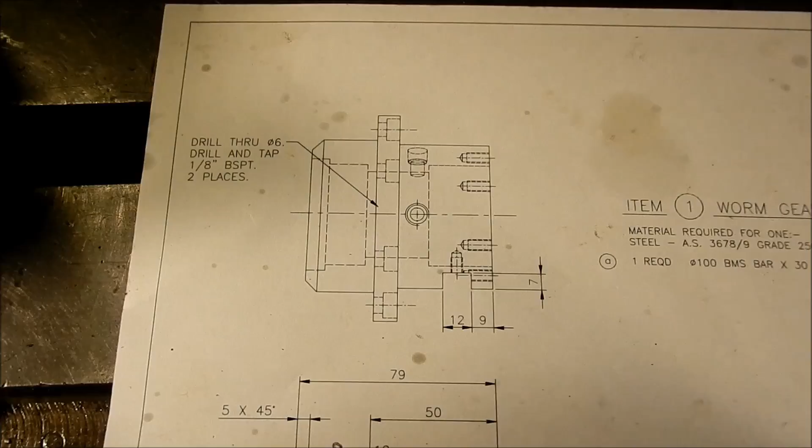We're going to set up on this housing to cut in this little slot for the motor anchor point. We're also going to do the drilling and tapping for the oil filler. We're also going to be drilling and tapping a couple of M5s in here for that motor anchor to bolt off.

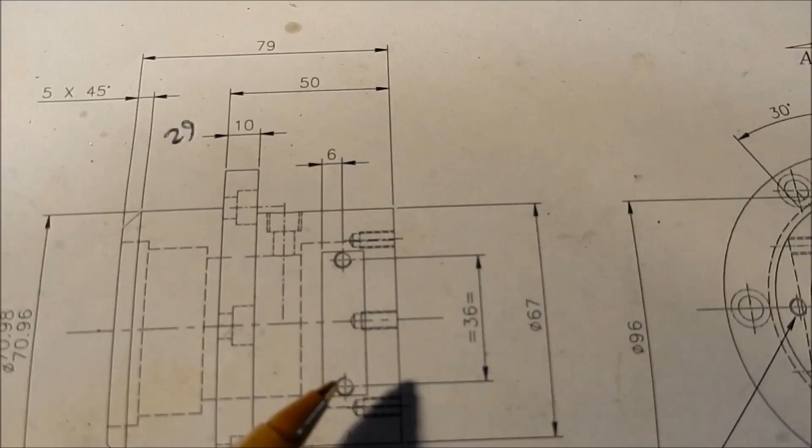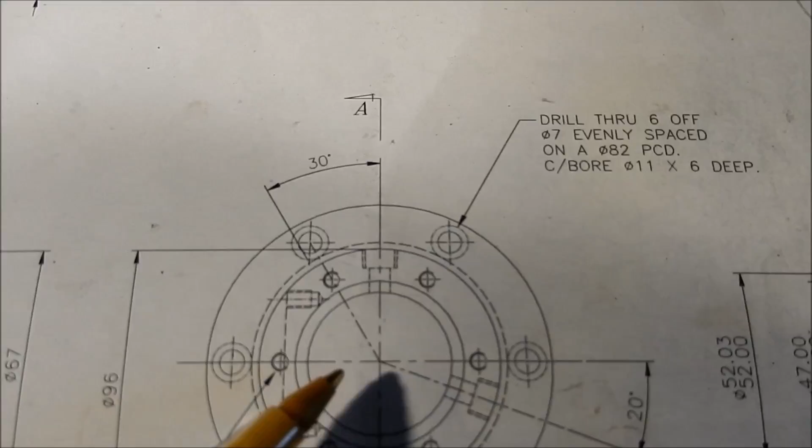And we're going to set up in V blocks a little bit later on to do the drilling for the oil fill level. That'll just set the oil level for us for those bearings. It's always good to have some sort of indication, particularly on a little tiny unit like this, as to how much oil you need to put in. So once it starts dribbling down the hole, you know that you've got it at the right level.

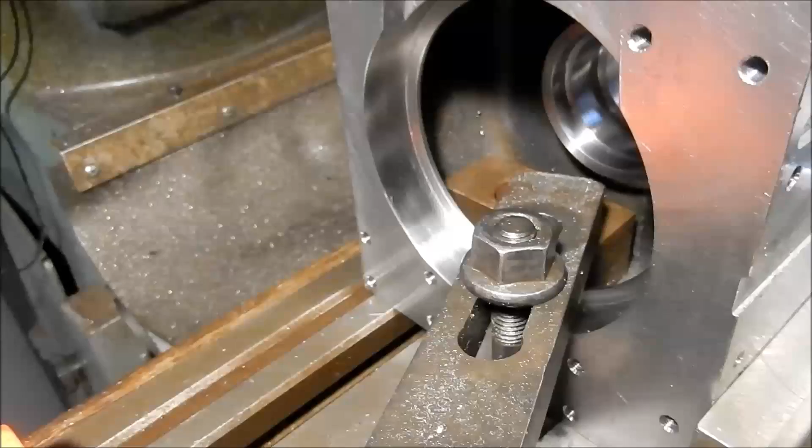So the setup is fairly straightforward. I've actually just bolted the housing, that's the worm wheel housing, onto the main gearbox housing. I've already done the edge find on this. That's on center. We're using a 10mm cutter, so we're going to slot through 10mm and then side cut 1mm either way to bring that out to 12mm. And on the far side, I've just got a finger clamp and a bit of packing in there, and we're up against one of the tenons.

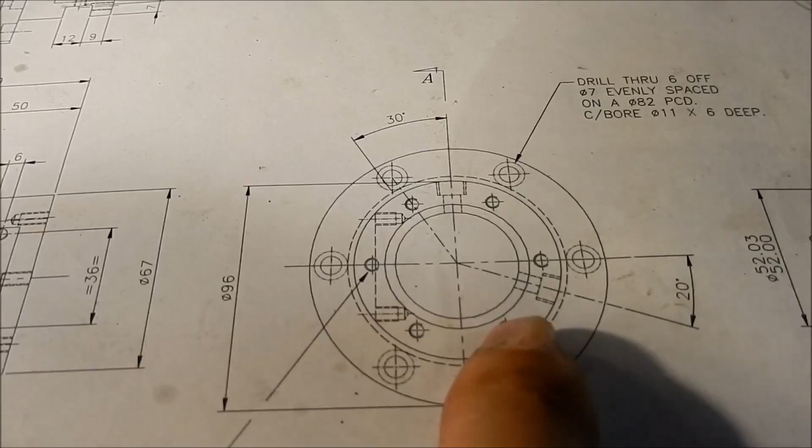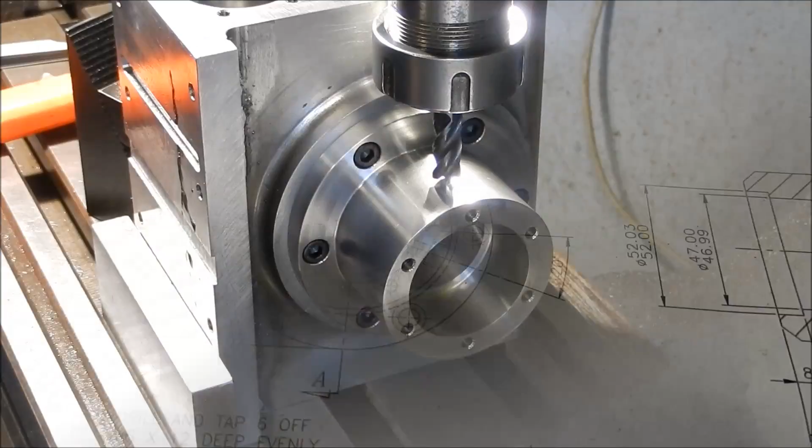When we've done this operation, we'll rotate it 90 degrees, and as I said, we'll drill the oil fill, and we'll take it off the housing, set up in V blocks, and we'll do a setup for that 20-degree rotation to get that oil level hole done. You see that oil level hole just sitting inside there. Alright guys, so we'll get this set up in the tripod and we'll get underway. Alright, we'll touch off and we'll drop down 7mm.

I'm only cutting this one way at the moment so that I'm pushing up against the tenon on that feed. Right, we'll do a side cut, 0.9mm. And we're also going to come down to depth, about that 7mm. I'll just measure that width, see if we need to side cut anymore. And as I expected, we've just broken through into that tapped hole, which isn't an issue.

So just as well you blokes are here to remind me, I forgot to drill and tap for the anchor supports first. Alright. So I've zeroed up. I've left that on 0 before we break the setup down. Zeroed up, come 18mm either side, and then we'll drill and we'll tap. So I just got the centre drill in there at the moment, so we'll do that operation first. Try and keep my hand away from the camera.

Two. I'm just going to get a tapping drill for the M4s, which is what these have to be. Right, I should have said M5 on that. So I've got a 4.3mm drill in here, and I've just got to be very careful that I don't break through into that bore. So my maximum depth on this is going to be 8mm. So I've already zeroed that out on the head digit. So we'll come on down and drill that out. And it's going to be right on the edge of that slot. Behind the camera. We're done.

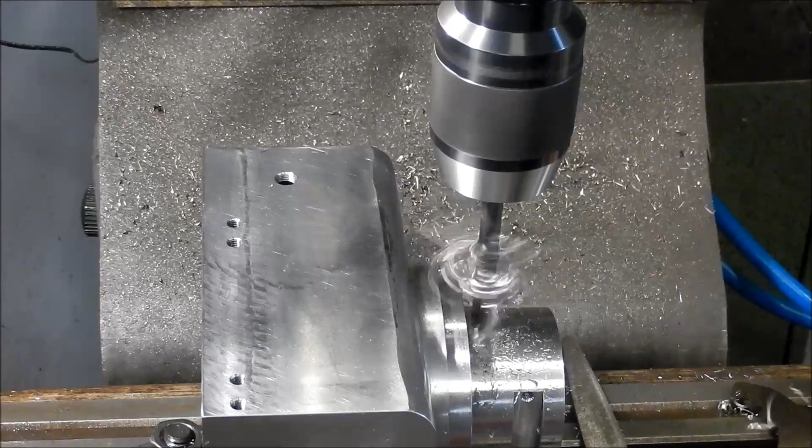And that hole has just come that side of the bearing register. So we've got a bit, we're feeling probably about 1mm of clearance there, so that's great. Exactly what we wanted. I'll set up and tap that out. Just try and work around the camera a bit here. Right.

Now I'm going to put a plug type with the socket for the Allen keys into this one, because I need to keep it below the level of those socket cap screws. So if I ever need to remove the housing, I don't have to keep undoing the plug. So, just see how that looks.

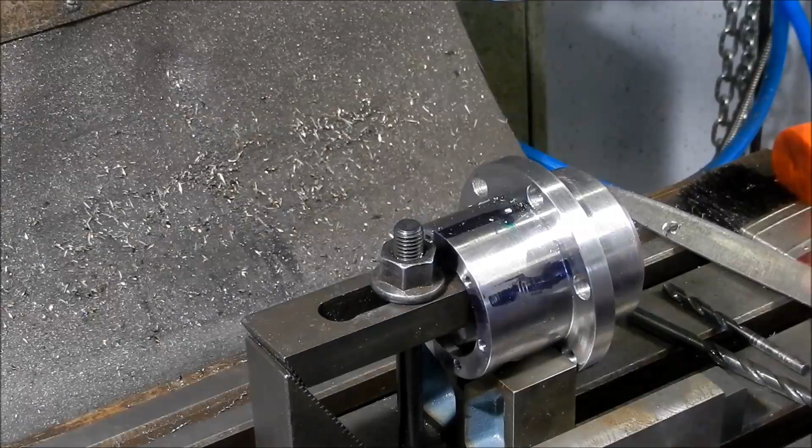I'll put the 6 in. We'll go right through with the 6 and then we'll open up with the tapping size for the BSP. We're going to go 7.5mm deep on that. A little bit more clearance to that register face. Alright, go with our tapping drill.

And set up our digi. Alright, we'll come down at 7.5. We can go a bit deeper on that actually. That's good, we've come down 10mm there. Alright, let's set up our tapping. A little bit more we can go on that.

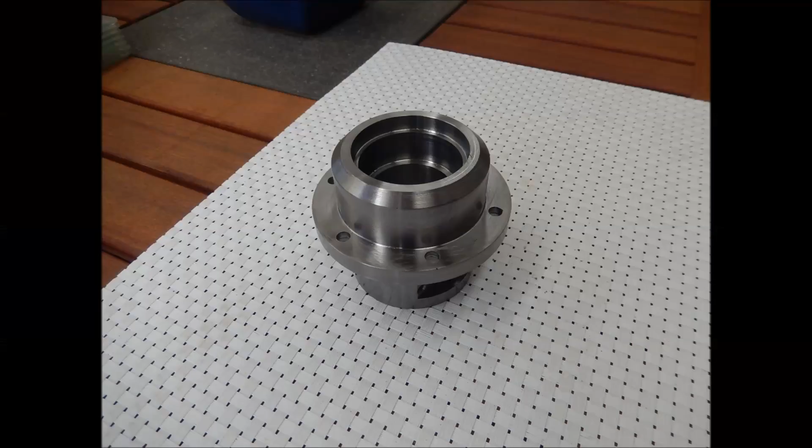Alright, I'll get set up to start machining the shaft that's going to hold that worm wheel in place in the housing, so I'll make a start on that now. Alright guys, we're going to kick off with our next component, which is the shaft here that's going to carry the worm wheel. So that's our worm wheel there.

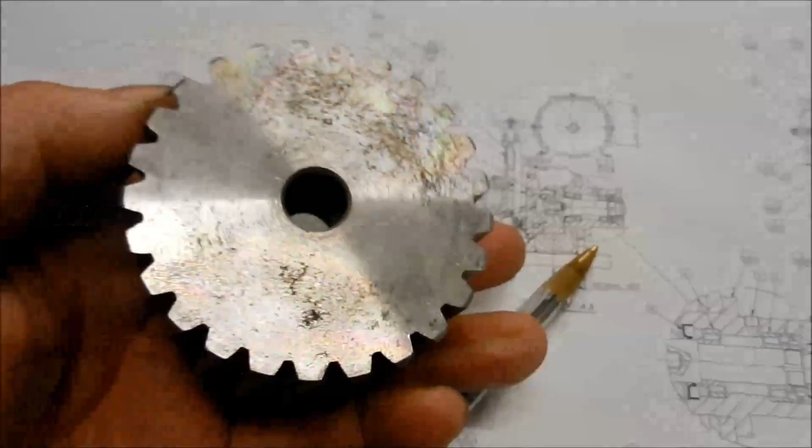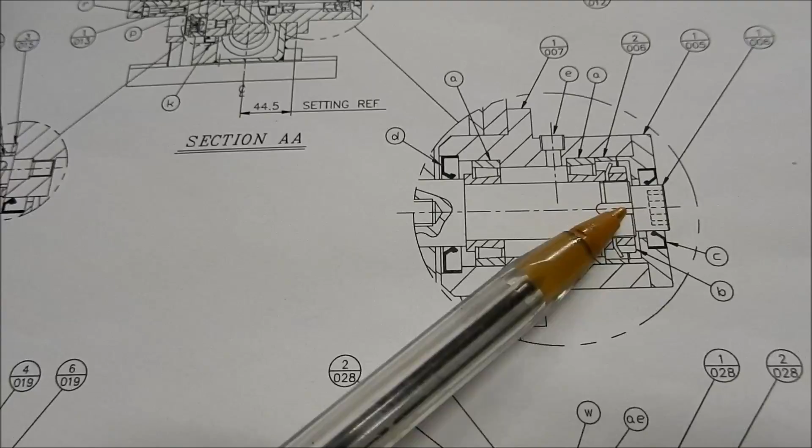And once again, it's a fairly straightforward turning operation. We've got a head bearing, a tail bearing. We've got a lock nut with a lock washer, so we've got to cut a little thread on it, and we've got a little keyway to cut for that lock washer, and then we've got an M12 thread that we've got to tap up inside here as well. So that's it on the GA, and that's what he's going to look like. Hopefully we can see that alright. So as I said, fairly straightforward turning operation.

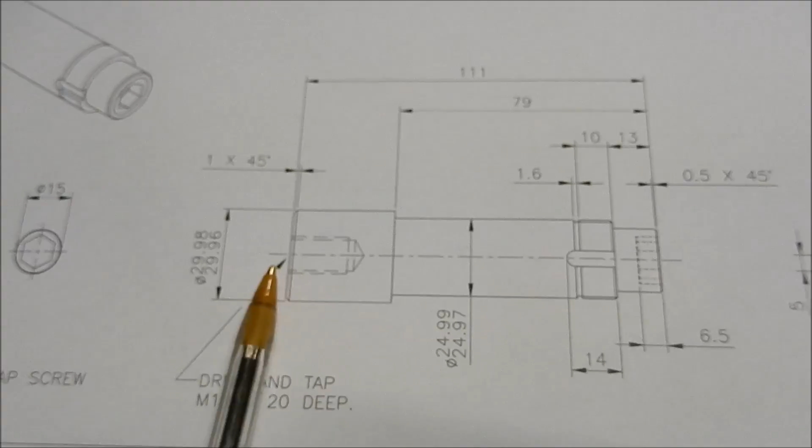Turning, bit of tolerancing we need to work to, that's for the seal face. A little bit different in here in that the back end I want to have a hex in there so that when we're doing up the crank arm, or initially when we're doing the socketed cap screw that's going to hold that worm wheel in place, it's always good to have something that you can grip onto, whether it's a flat for a spanner, or in this case here I've got a socket for an Allen key to fit into.

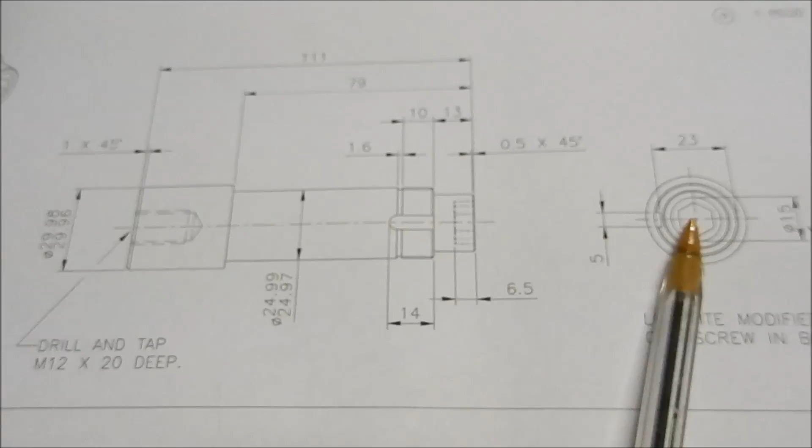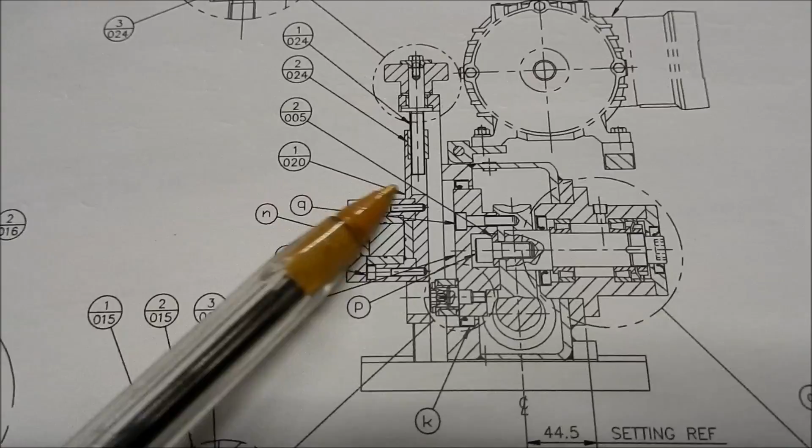So when we're changing the crank arm over on the disc to various stroke lengths, when we're doing it up, we want to be able to hold it somehow so that the shaft just doesn't spin. And I'll go back to the GA here. Hopefully we can see it a little bit better. So there's our crank disc. There's our crank arm, which has got the pin through it. And that's the one that we can adjust and put into various positions depending on the stroke that we want to run on this slotter.

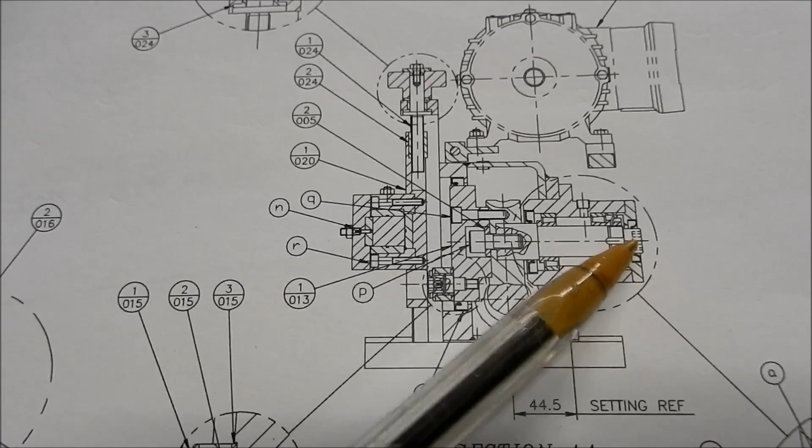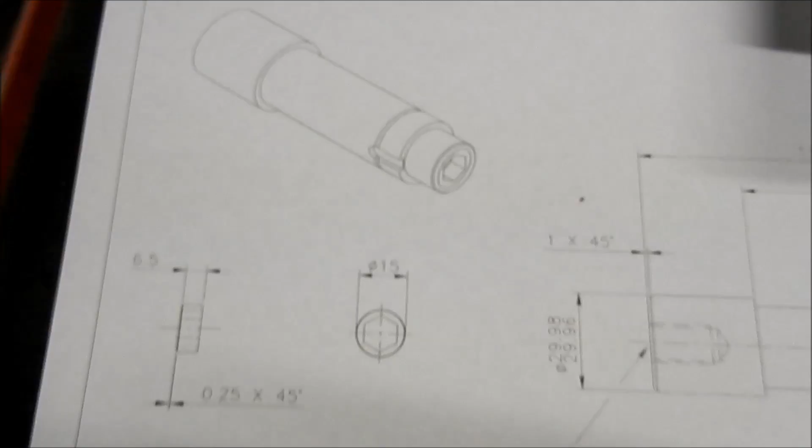So when we're doing that up, we can put an Allen key in the back end here and hold that shaft from turning while we're tightening up that pivot bolt. So that's what we'll kick off on. So it's going to look like this in ISO. As I said, we've got an M12 socketed cap screw. We're going to hack down and get the hex out of that, and that hex is going to be Loctited into place.

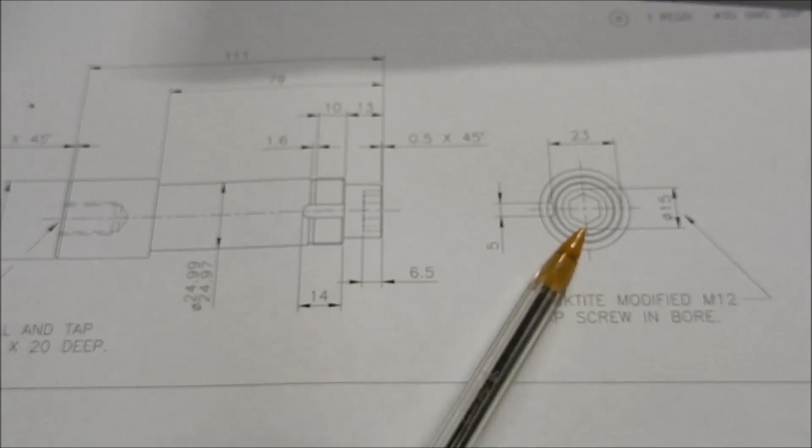And I've used this a number of times in a number of different types of assemblies, and it works extremely well. It's probably a cheat's way if you haven't got a rotary slotter to be able to cut a hex in, or some sort of gear that you can hot cut it in. Doing it this way, Loctiting in a head's the next best way of doing it.

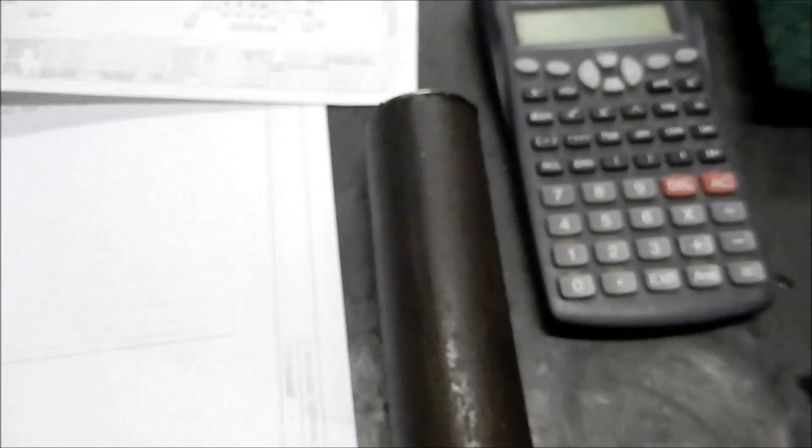So that's our bit of rusted up steel we're going to use. So we're going to cut that off at about 115 long. Give us a couple of mil to be able to clean up on the ends. That's measuring at 38, and we've got to come down to a nominal size of diameter 30. So we'll get that out to the bandsaw and we'll start cutting that up.